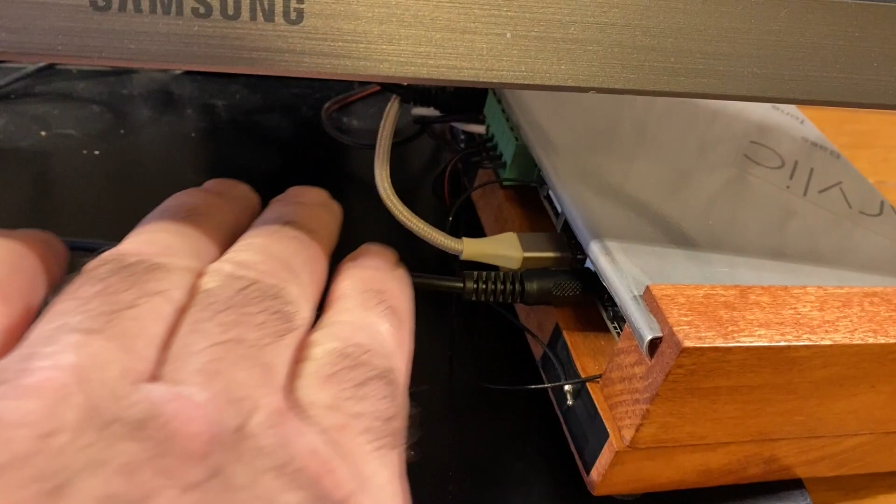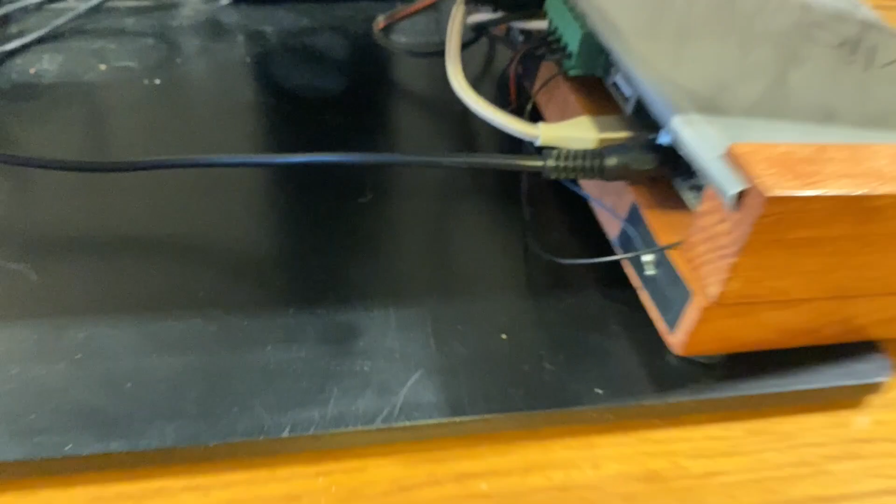All right, so to start off, I've got the Arylic board in this cabinet right here that I've put together. You can see it right in the back here. I've got the standard audio input that I've been using, also the USB connections. I've got the speakers hooked up, and of course, way in the back here, I've got the power. So that's your Arylic board. You've got the two antennas on this.

And then you'll notice I'm using a Mac. So because of that, I'm going to have to use a Windows machine that's off in a closet in my house. So I'm remoting into this Windows machine and sharing my local USB port here so that my Windows machine can get to the Arylic board itself. Hopefully that makes sense. If not, I can draw something up for you, stick something in the comments, and we'll get it figured out.

Zooming in here, this is my USB share, and I can share all the local ports that I've got here on the Mac. So I'm going to grab this Up2Stream and use this device. The piece of software I'm using is VirtualHere Client. It's free and it works great for this purpose. So I'm using that Up2Stream USB audio connection, right there. Hopefully that orients you to what's going on. Let's get into the software here. I'm going to maximize this to make it a little bit easier.

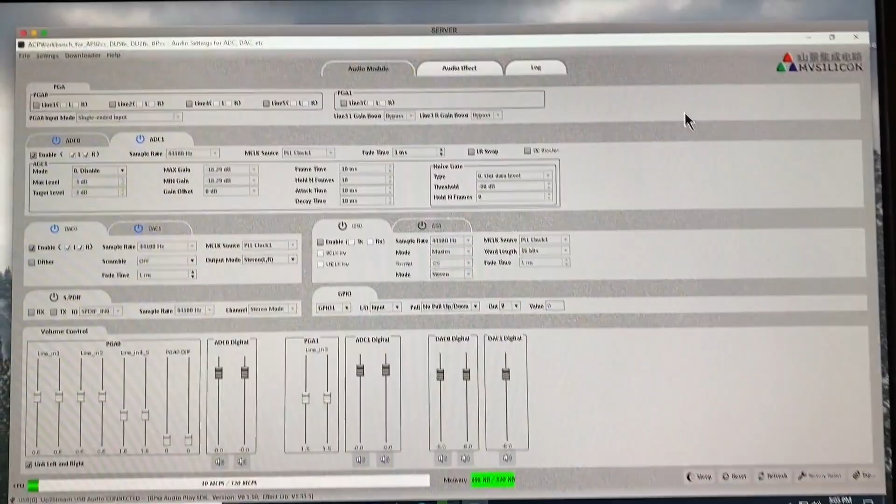Going through the software, there's a lot of different features that pop right up. You can see the PGAs that you've got installed on the board. Each board is going to be a little bit different. You'll see the ADCs that you can enable or disable. On this board, I've got two ADCs because I've got the standard stereo ADC, and then I've got the ADC for the subwoofer side of the amp. On this board we also see DAC 0 and DAC 1.

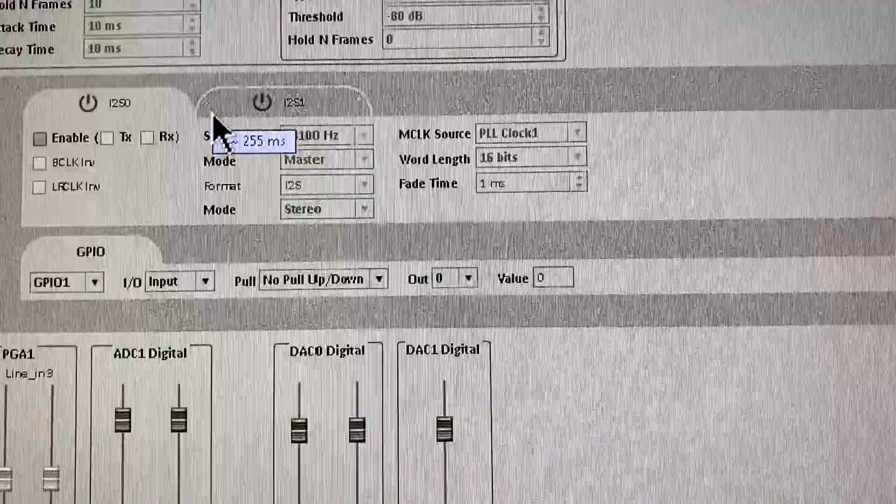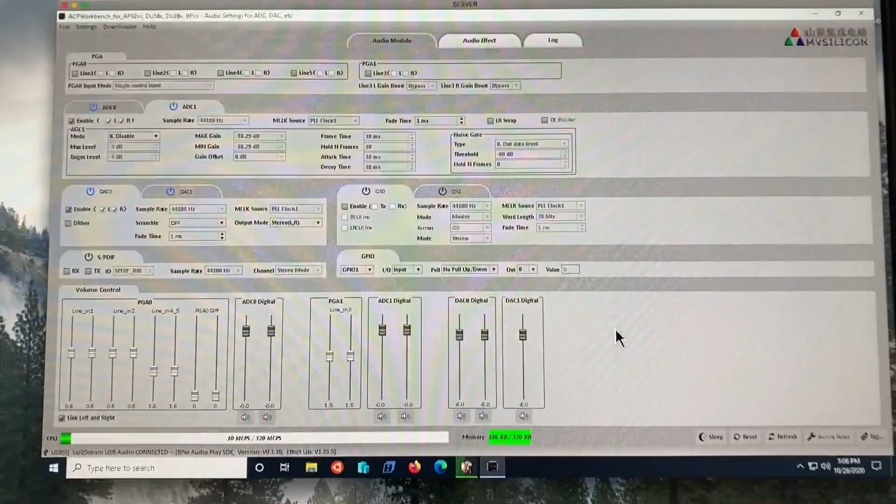We've got some I2S out that we can turn on or off here. I'll be honest, some of this stuff I don't know the full extent of its functionality, so I'm just going through these features for folks that maybe already know or want to look into it. You've got your SPDIF connection that you can turn on and off. You simply select the power button to turn things on and off. Down here we've got our mixing capabilities for our PGAs, ADC digital 0 and ADC digital 1. Zooming back out, let's go into audio effect.

Here is where it really got interesting for me. There's a main EQ that you can turn on and off. I left mine off, but within this main EQ, there are filter points that you can set up, and they're adjustable. You can adjust the type of filter that you've got, so you might have a notch filter that you can adjust completely. That's the frequency it's centered on. Let's change it to 500 hertz. There you can see the graph changed. It's centered on 500 hertz.

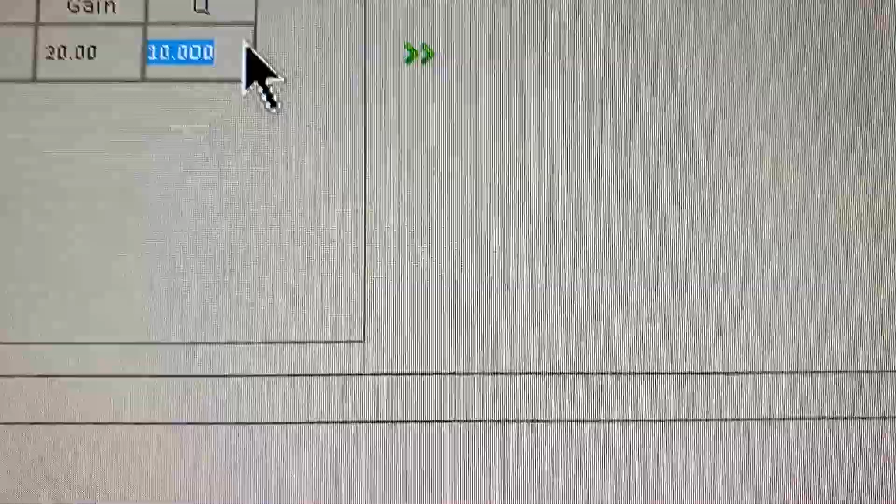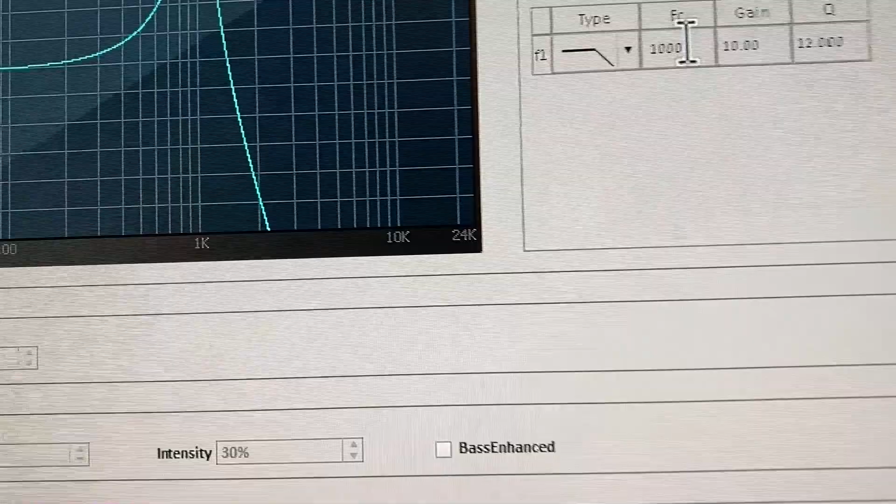You can also change the effect that it has. I'm going to change that to a 1. There's that filter graphed out for you. I'm going to get rid of that filter. Here we've got a roll-off filter that you can implement. It's centered on 1,000 hertz. Let's center that on 2,000 hertz and see what happens. You can see it jumped up to 2,000. Pretty cool stuff there.

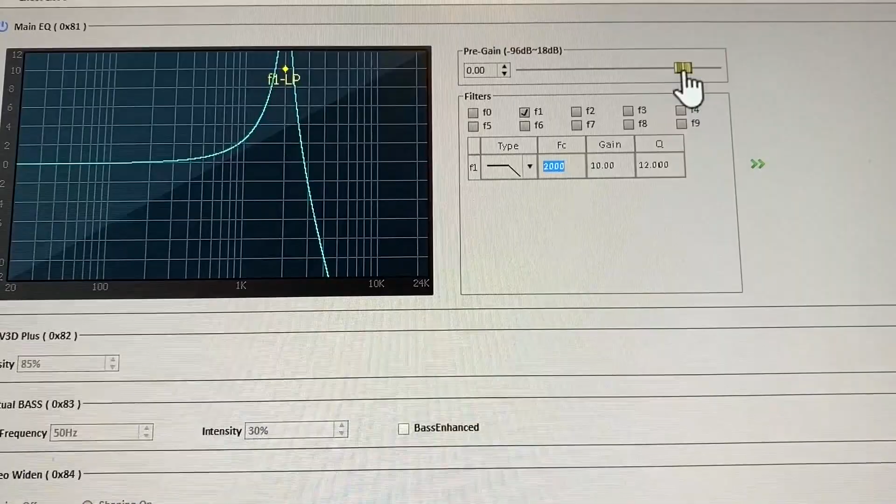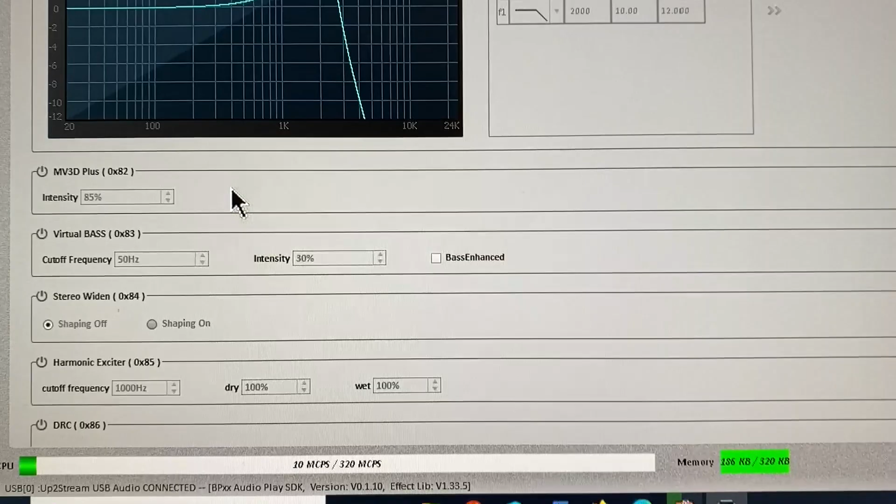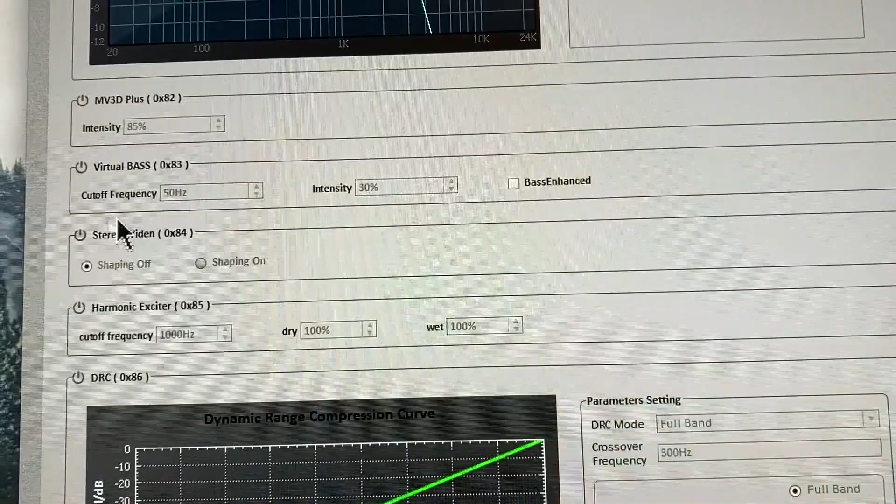You can get really detailed with these filters, and you can increase or decrease the gain on each filter. I'm going to turn that off. MV3D, I'm not 100% sure what that is. I believe it's got something to do with three-dimensional processing; it looked pretty fancy, but I'd have to read into that. Virtual bass is simply that, a generated bass that I don't use. Stereo widening is another feature that I'm not going to be using.

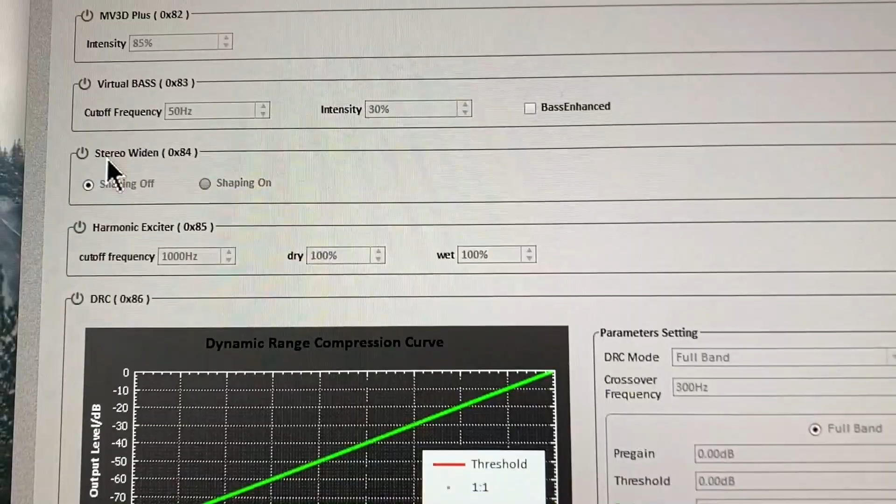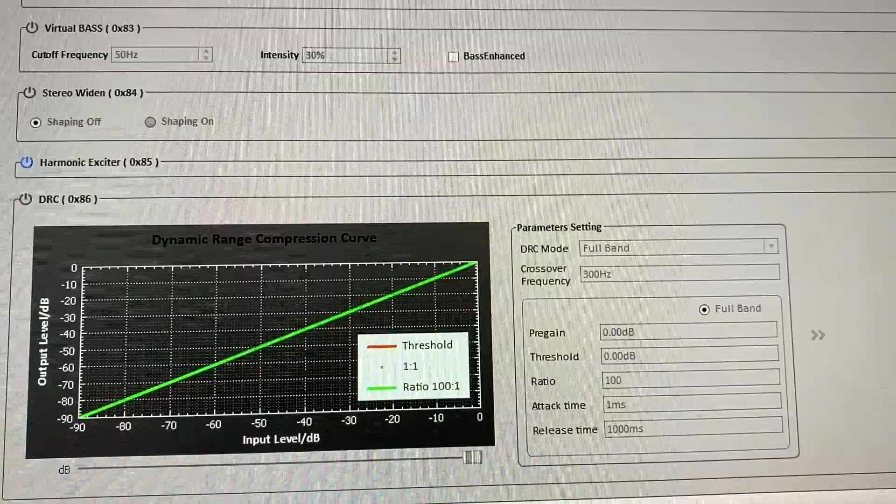Then you've got a harmonic exciter, which is kind of interesting. You can add in harmonics so that you get that pleasing second order harmonic that you can play with a little bit on this amp. Whoops, I minimized that. Now, I don't add any harmonics. It's a common tool that a lot of recording artists use.

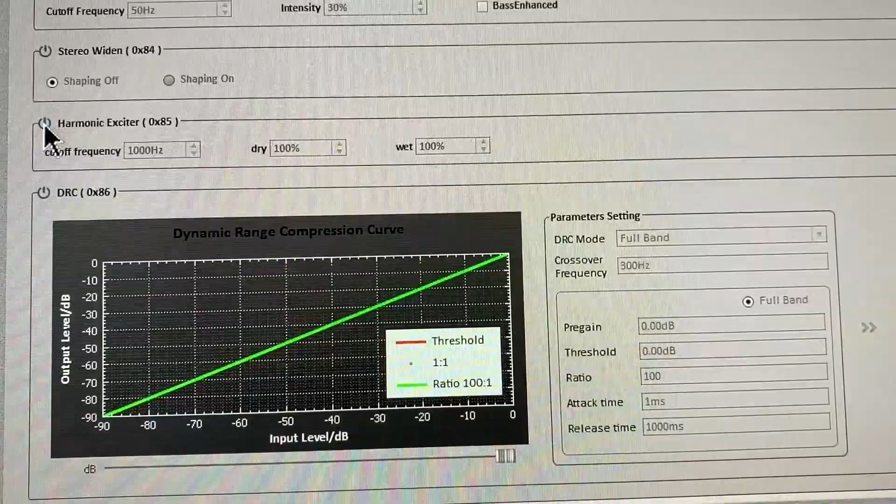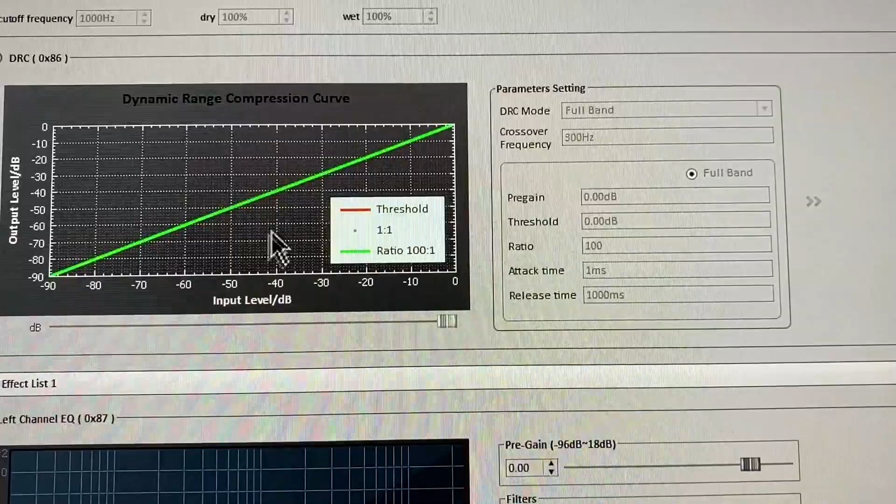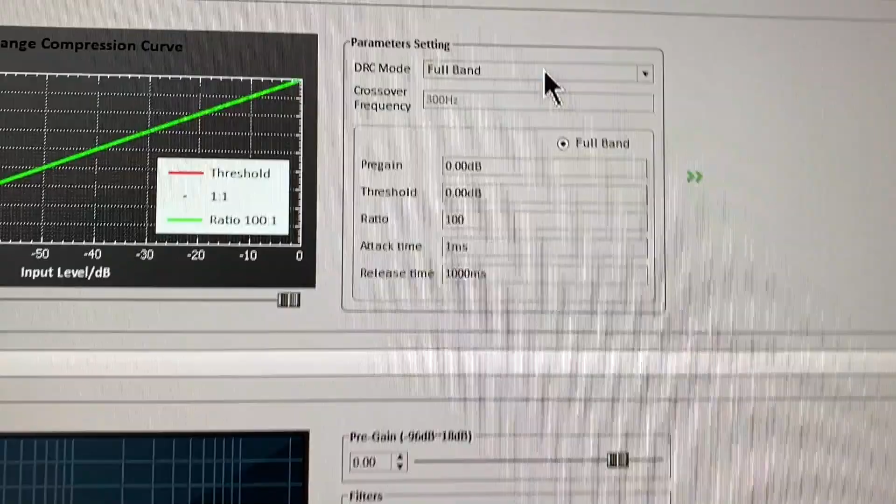But that's not something that I really have dived into. All right, so here's a DRC. The dynamic range compression curve enables you to do dynamic compression in specific areas, right? So you can do a full band, you can do second band, and different types. So let's just see what this does here. And you can set the crossover frequency.

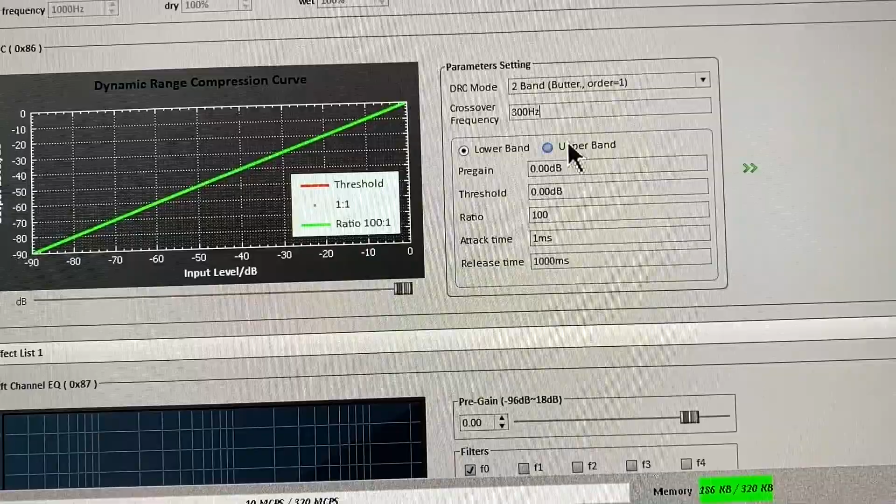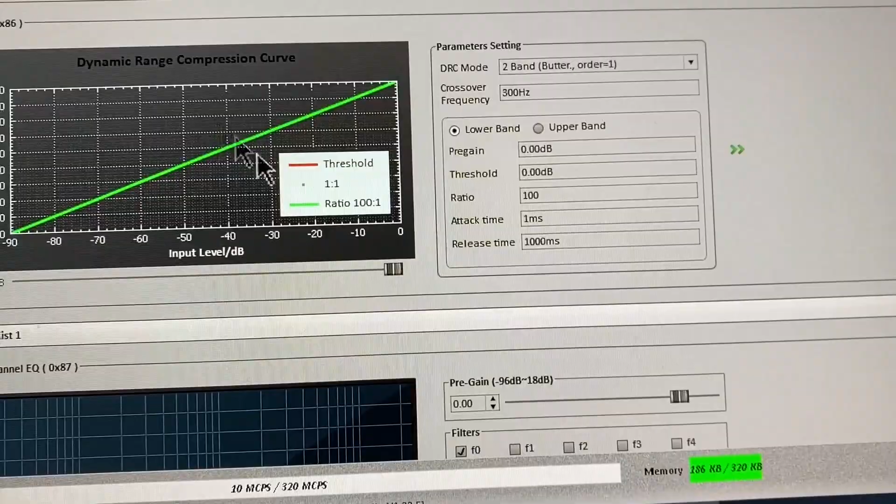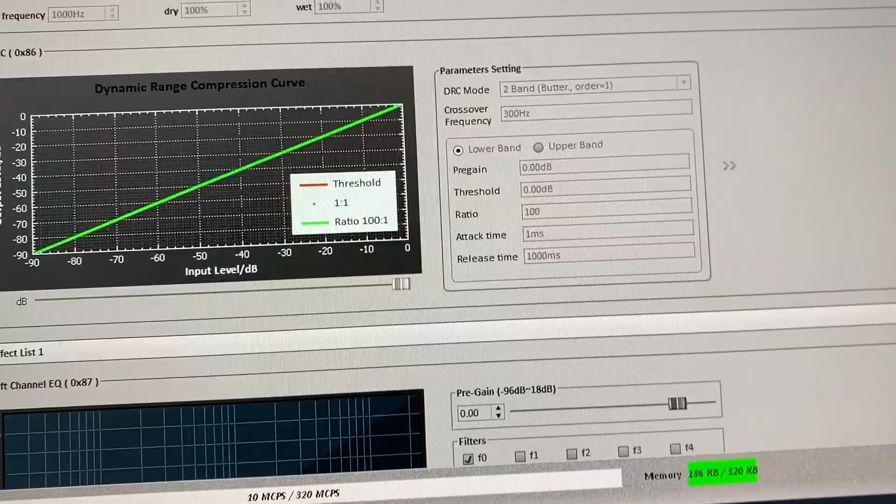Honestly, I'm not really sure how to use this, but at the end of the day, I'm not very interested in range compression. I want the amp to be in full, what can I say? I basically don't want to implement any compression in it. So I keep that off. Now depending on your room and depending on your speakers and setup, that might be something you're interested in. So, it's tunable. There's a lot of things you can do with that. I haven't really delved into it too much.

The one place I did find very interesting with the workbench tool was basically the fact that you can pre-gain both your left channel and your right channel, not EQs, but amplifiers. And you can set where the crossover is, in essence. So here, this corresponds to the crossover that you set on the front panel by pressing these knobs. It's the same crossover. So let me just scroll up on this. There we go. All right, so that's both our left and right channel.

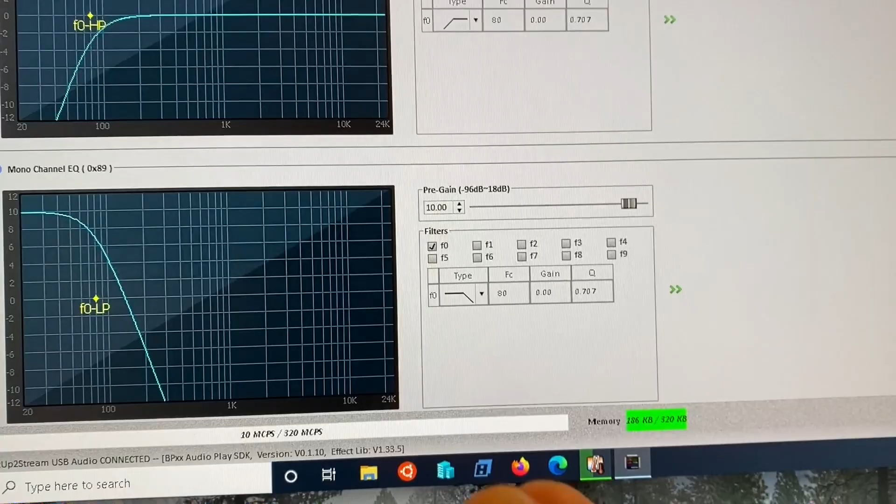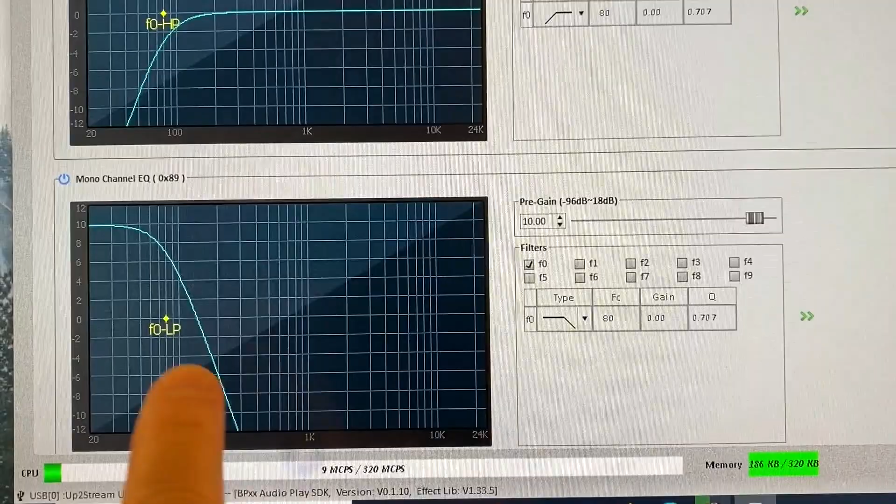I'm gonna go down to where I think it's interesting, to where the mono bass channel is. So this is the mono amp for the subwoofer. The reason it's interesting for me is that my subwoofer is not very efficient, so to really tune that subwoofer to the main speakers I'm using, I needed to bump the boost on this mono channel quite a bit. Once I bumped it up by 10 dB or so, it sounded fantastic. So I was able to not only set that crossover frequency, as you can see here, but I was able to bump the gain on that entire amplifier up.

So now, if you wanted to get really fancy and kind of overlap things, like your right and left channel maybe crosses over at 100 hertz, let's just try that and see what happens here. Okay, so I changed my crossover there to 100 hertz, but the mono channel, the subwoofer channel, crosses over at 80 hertz still. So you can play with those crossover spaces just a little bit there. And I thought that was kind of interesting.

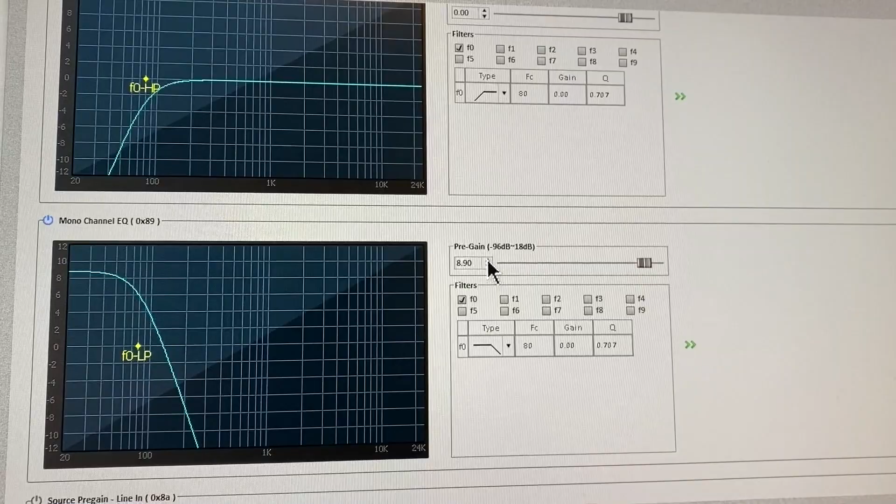Anyways, that was really the feature that I wanted out of using the ACP Workbench tool. There really wasn't anything else that really grabbed me. There's a ton of stuff you can do, but my biggest problem was just where that crossover point was and how much gain I was getting on that bass amp. Hopefully that makes sense for you. Okay, so I noticed here that got changed, so I need to bump that back up to 10. And once I make that change, it's already saved to the board. So I don't have to go and save it or anything like that.

Okay, so the other thing you might be interested in is that you can go to the logs. You can make a log of all your changes if you wanted. I didn't, but others might want to do that. All right, so back on the main menu here, we've got our firmware upgrade that we can do to any of the boards that are connected to the USB port. Let's see. You can set communications type right here. So if you wanted to use another communication style, you could do it there.

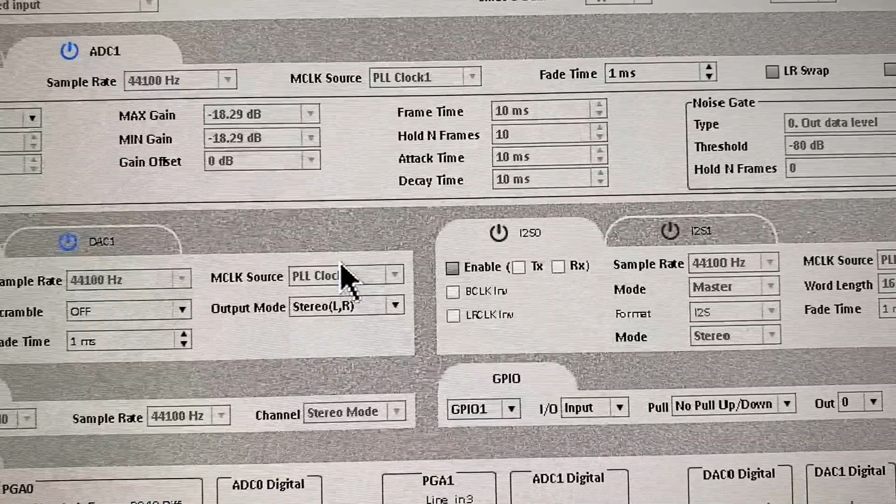All right, so you can save these settings, right? So I've already saved these. You basically hit export and you choose your file name, bass amp final settings, and save. Yep. And now you've got it saved. So you could have a bunch of different settings. Maybe you're using the amp in different locations for some reason and you want to change it. You could do it through this tool pretty quick.

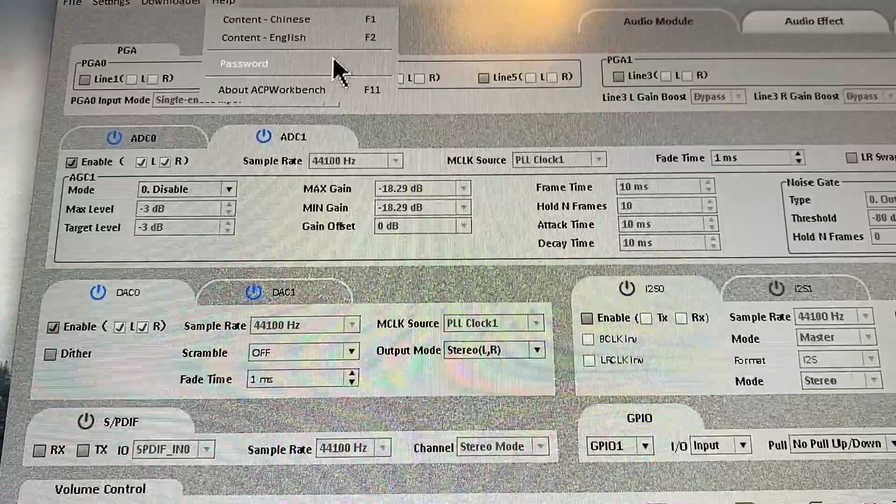All right, so it does have a nice Chinese and English help menu that you can go to. You can set a password and then about ACP Workbench. I'm on version 2.21.14 of the ACP Workbench. So pretty cool tool. There's a lot of stuff you can do with this. I've only touched just a tiny bit of it.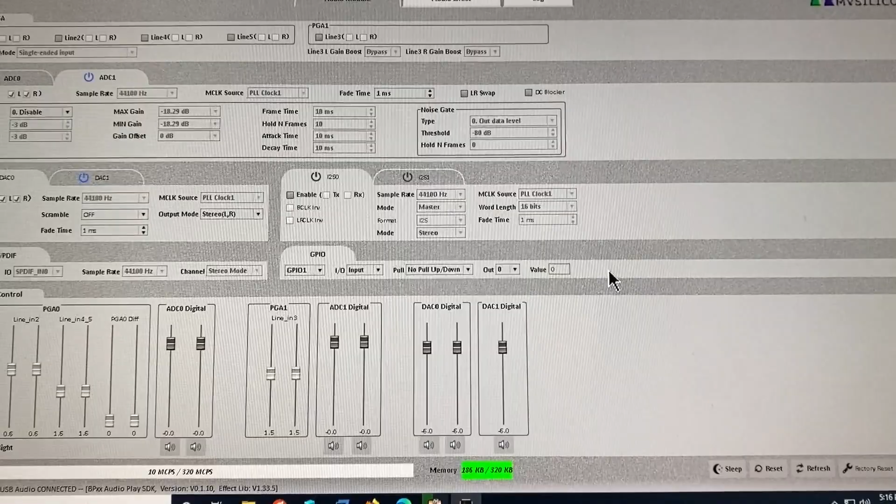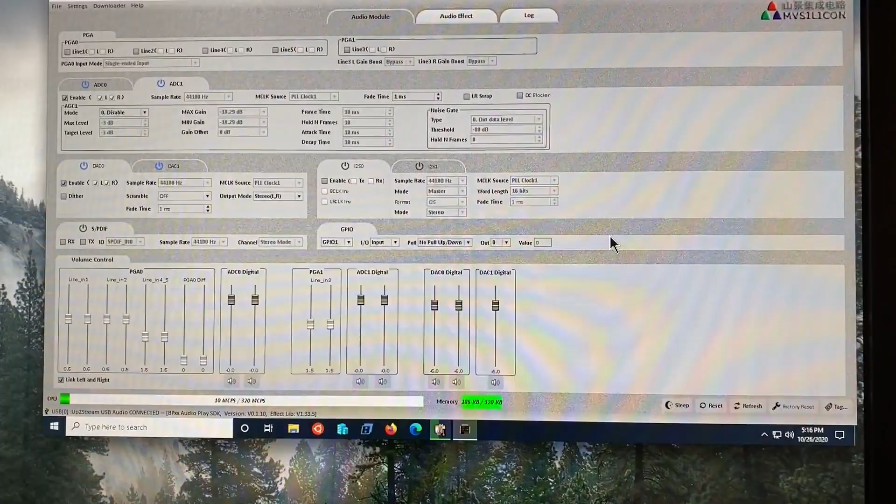And I think that for people that are installing these modules in systems or in houses or whatever you're doing, you can really change the way the box sounds simply through this tool. So if maybe your speakers are deficient in some way, or maybe your room is deficient in some way, you can really tweak the sound of this.